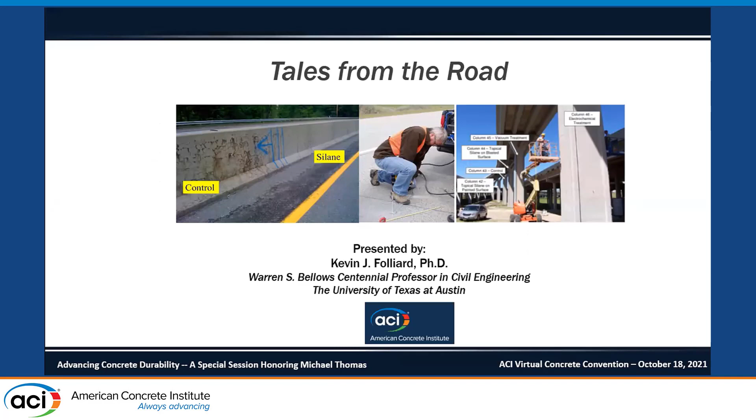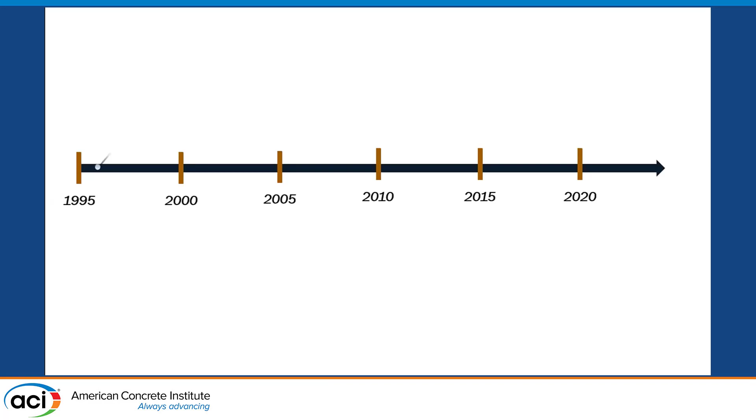Just thought I'd start with a real quick timeline of my experience with Mike. My very first interaction with him was when I was a research engineer at W.R. Grace, having just finished my PhD. It was Doug and Mike that came to visit us in Cambridge. I remember they both gave great technical presentations, and when I walked out of the room, I had one thing in mind: the picture of a moose that Mike put in the middle of his presentation for no reason, just saying, 'This is a moose.' I kind of liked that. It stuck with me for a while, not only the technical goodies I got, but the humor.

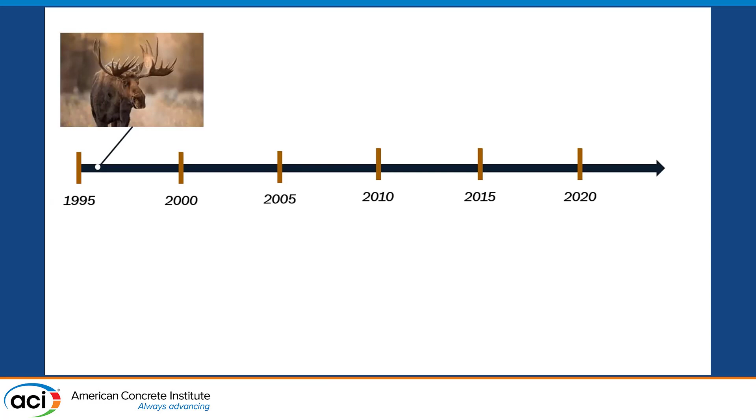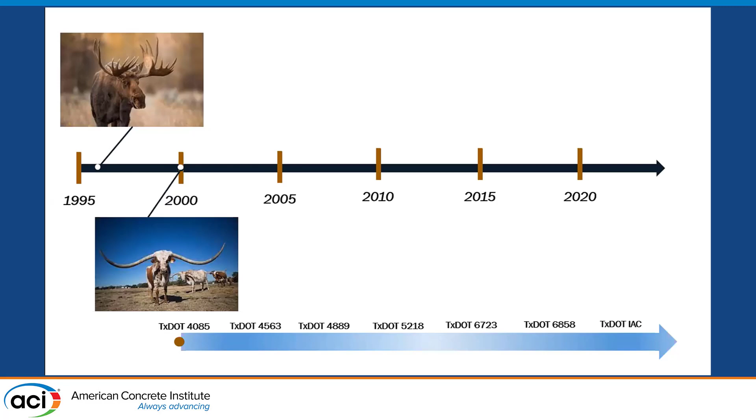I didn't have really any interactions with him for several years until I moved to Texas. In the year 2000, I reached out to Mike because we had a TxDOT project we were bidding on related to ASR. Since then, we've been working continuously, a 20-year-plus collaboration that's still ongoing, on a whole bunch of different TxDOT projects, mostly related to concrete durability. In fact, Mike was honored with a great bumper sticker because he's done so much great work in Texas. So he's a true Texan now.

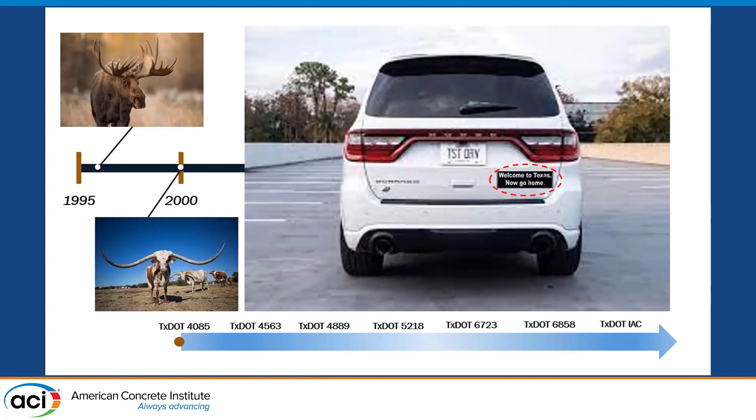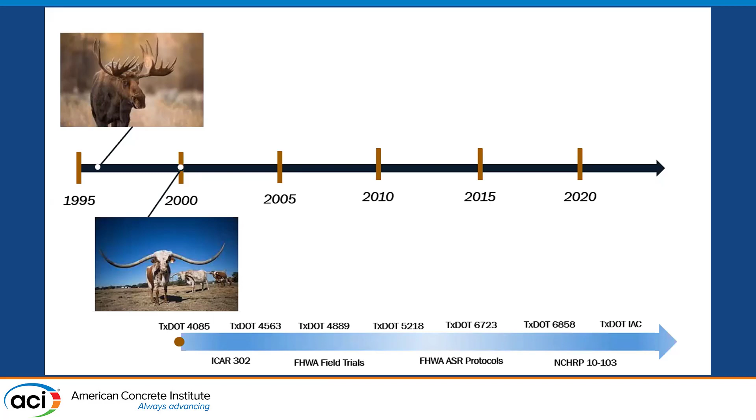Our work extended beyond TxDOT projects to funding from ICAR, Federal Highway, and more recently the NCHRP project with Jason and Thano and myself and Ben. In addition to that, I've also had the pleasure of teaching training courses with Mike for most of the last 15 years, both for industry and academia.

There are occasions that we actually put on small skits, and this was one where we were pretending to be admixture salesmen. So I guess the question is, would anybody buy admixtures from us? I would tend to doubt it, but we'll see.

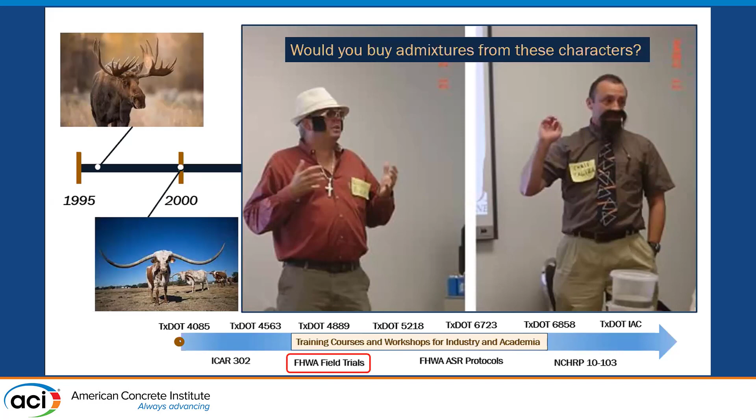Mike's had a tremendous impact on me personally and professionally. When I first arrived at University of Texas, you can see this picture, we had a lot of space and a very ugly, unusable lab. One of the things I learned from Mike is that exposure sites are absolutely critical when you're doing durability work.

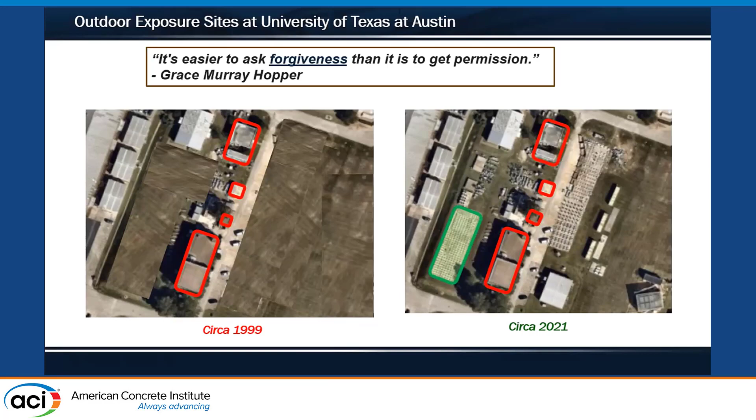Fast forward 20 years later, we have the original footprint of our buildings, but now you see a recent map showing a very large ASR, DEF, and sulfate exposure site. We have sites for bridge deck cracking, ASR for existing structures, carbonation, and more ASR. So I've learned from Mike: you don't ask, you just take. So far, nobody has tried to take any of our land back.

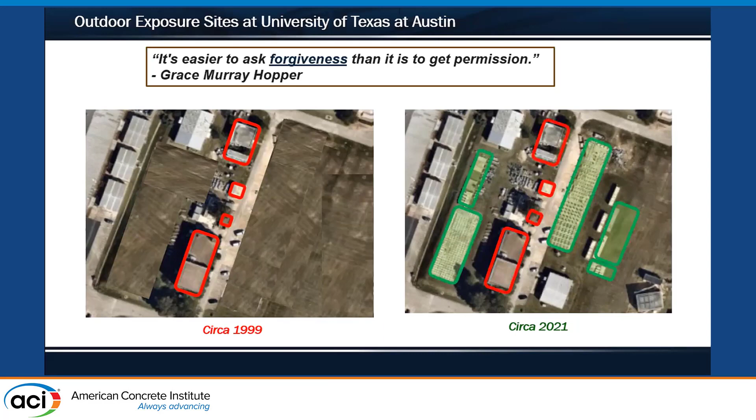We've extended our exposure sites beyond Austin. We now have sites along the coast in Port Aransas, and also a West Texas site. Mike and I have been frequent visitors to the marine site, but neither of us have made it to the West Texas site, and you might be able to guess why. These exposure sites have had a great impact on our program, and honestly, we wouldn't be doing any of these sites without Mike. Most recently, this marine site, which is really unique, having some space on the Gulf of Mexico.

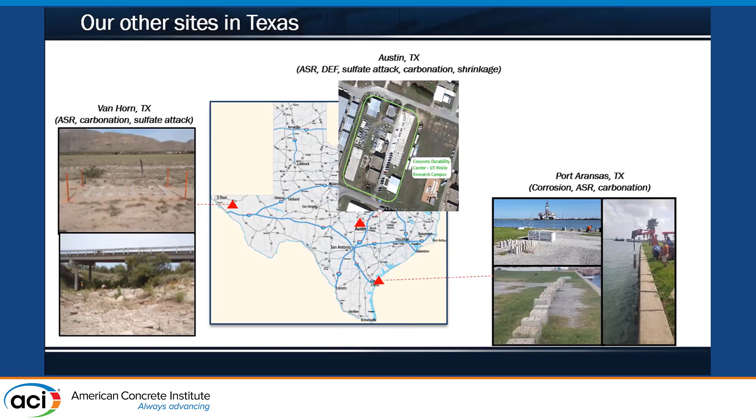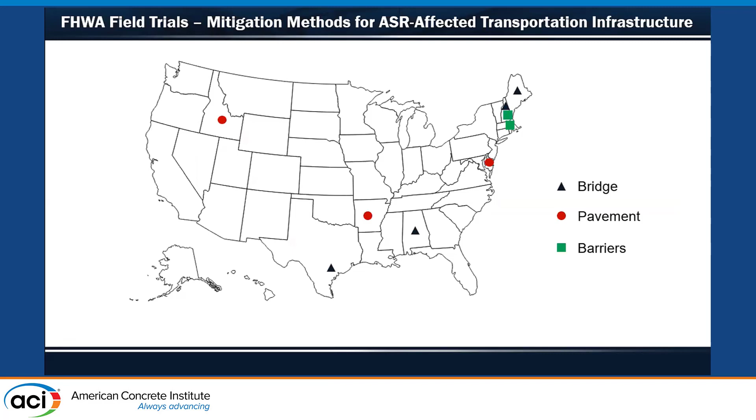What I am going to be talking about today is mainly just focusing, pretty quickly, on the work we did under a multi-year Federal Highway project. The goal of this project was to look at technologies for trying to slow down ASR in field structures. This included bridges in various states, pavements, highway and bridge barriers, and we also included two outdoor exposure sites as part of our field trials. Personally, one of my proudest accomplishments is convincing the Federal Highway Administration to allow us to build an exposure site in Hawaii, and I think collectively, as a research group, we're very happy with that decision.

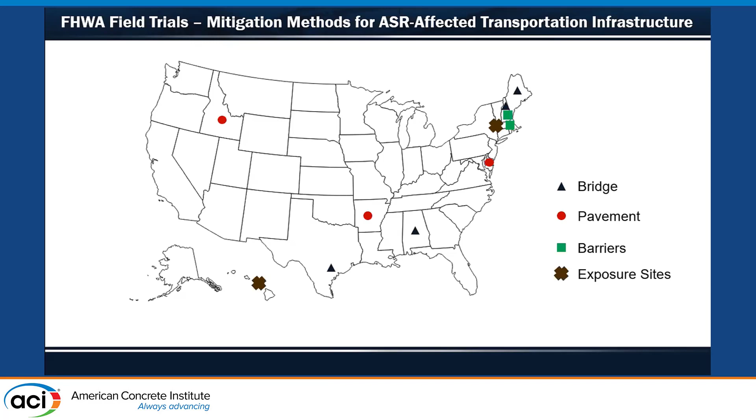What I'm going to focus on today are just a couple of these trials, really quickly, and then we'll move forward.

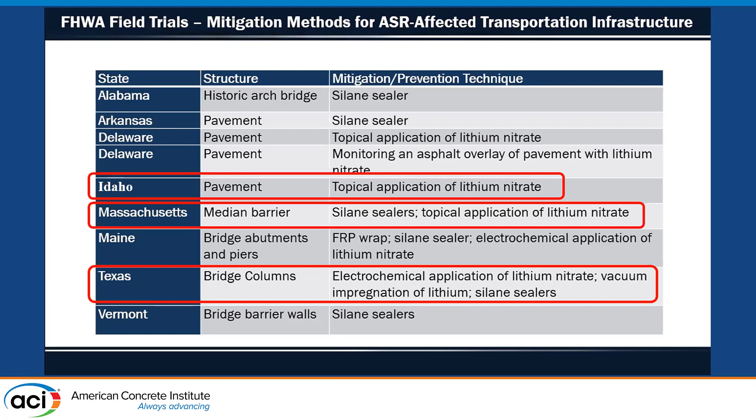These federal highway trials covered a whole range of different structure types and geographical locations. I'm going to focus on just a couple of these, in Idaho, Massachusetts, and a little bit of work in Texas as well. This funding was actually allocated through federal highway funding, earmarked for lithium research.

Lithium has been shown to be effective in reducing expansion in new concrete, provided you put enough in and the aggregate responds to it. The mechanism by which lithium prevents ASR is still not completely understood, but we believe it has to do with modification of the gel, where lithium is incorporated into the alkali silica gel and creates a much less expansive gel.

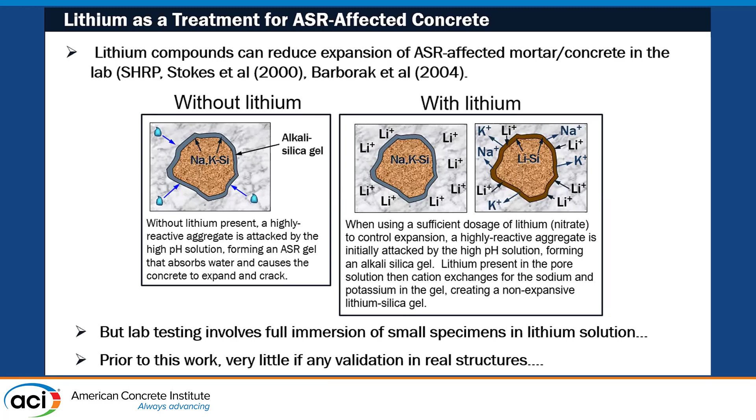The fact that it works on the existing gel has created interest over the years in using this as a post-treatment for existing structures. There has been work showing that in small laboratory samples, you can reduce ASR expansion. But we have to keep in mind that the vast majority of this work has been done on very small samples with full immersion, which is certainly not realistic with regard to field structures.

When we first started doing this work with Federal Highway, there had been quite a few field trials prior to this in the US involving lithium as a post-treatment for concrete. Almost all of this work involved pavements, with some work done on bridge decks. The problem is, historically, there has been essentially little or no data to confirm whether lithium is effective in this post-treatment regime. That's kind of the way we came into this project, with that as a backdrop.

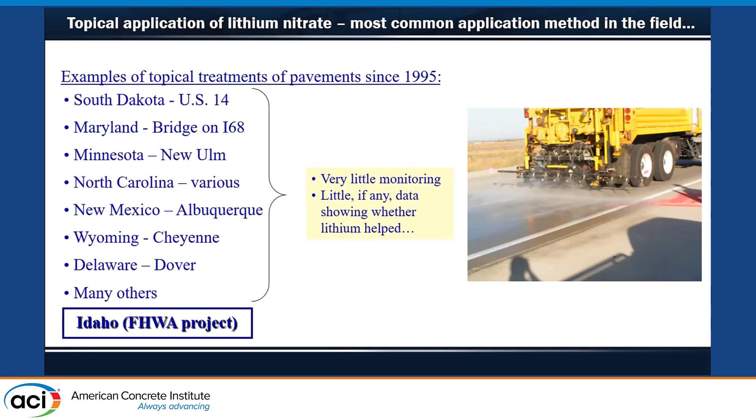One of the things we started with was looking at a freeway on I-84 in Idaho, in mountain home, Idaho, that has suffered significant ASR-induced expansion and cracking. It was an ideal site because it was relatively long and had pretty large sections with different levels of damage to date. We were able to pick essentially 3 different degrees of severity, and for each of those, we did topical lithium treatment.

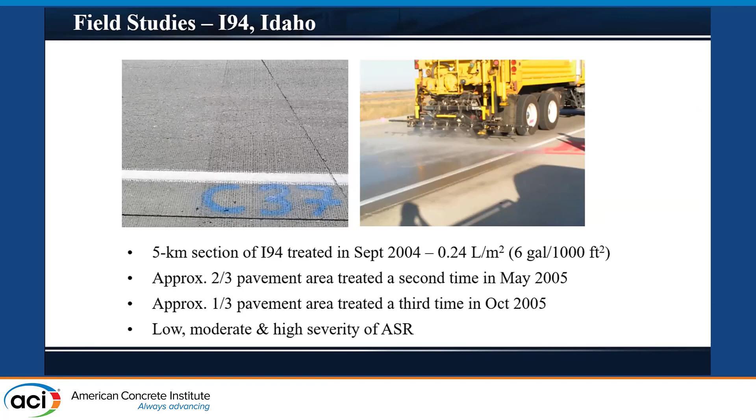In some cases we did multiple treatments, and then we did full-scale monitoring. When it comes to monitoring in the field, we do a lot of in situ measurements where we embed gauge studs into the concrete for expansion measurements. We also track cracking and crack widths with a crack mapping technique, and later on we come back and pull cores to see how much lithium penetrated into the concrete.

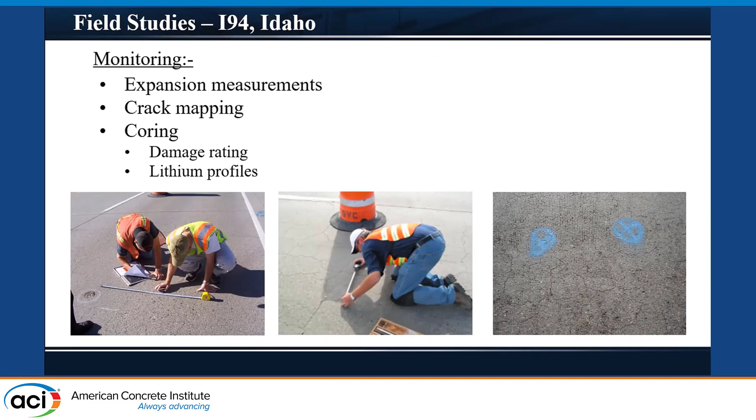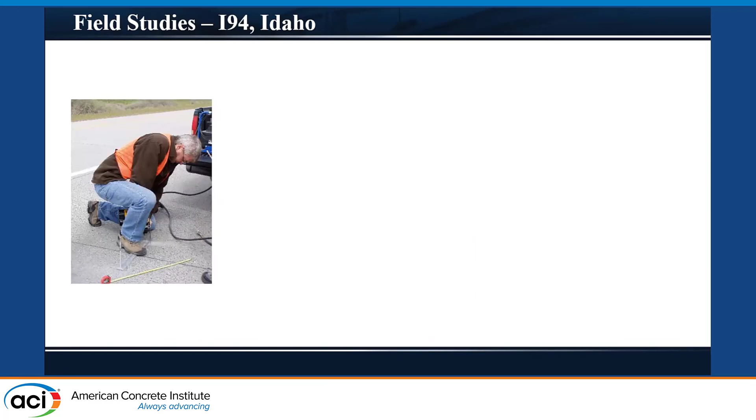When we first arrived in mountain home and started to drill into the pavement, we had a heck of a time with this pavement. Here you can see Mike trying very diligently to drill into that concrete, and it just wouldn't go. We were eating through drill bits one after the other, which led to discussions about the geological formations in Idaho. We had all kinds of detailed studies, but didn't have a lot of time given that we had lane closures and had to get our job done.

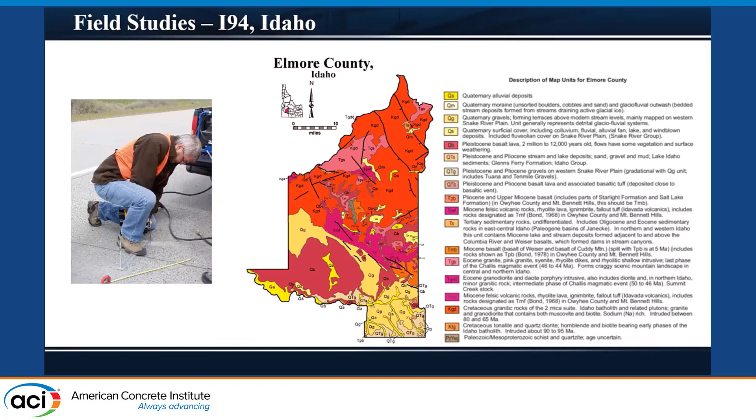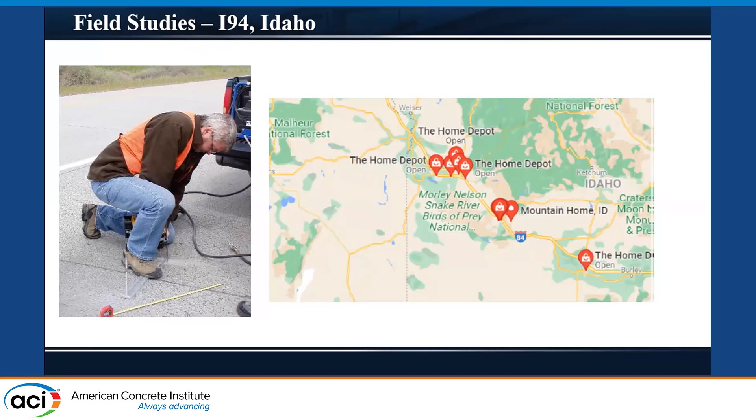So as a good team, we sent our crew to various Home Depots throughout the state to pick up every masonry bit we could find and bring it back to us. One of my grad students came back with the drill bit and asked if he could give it a shot, at which point he realized we were drilling in reverse. So that's one of the names we call our team, the reverse drillers, and that's why. Ultimately, when we reversed the direction of the drill, everything worked fine.

And not very helpful when you consider that the upper 1 or 2 millimeters are already carbonated, so they already have a low pH, and it's succeeded in reaching the one part of the concrete that doesn't need it.

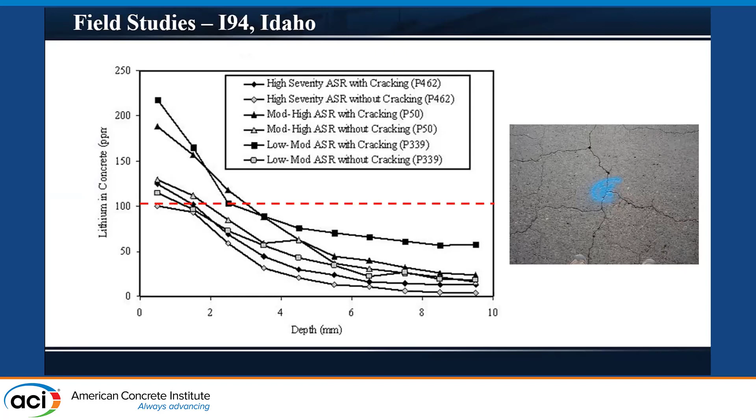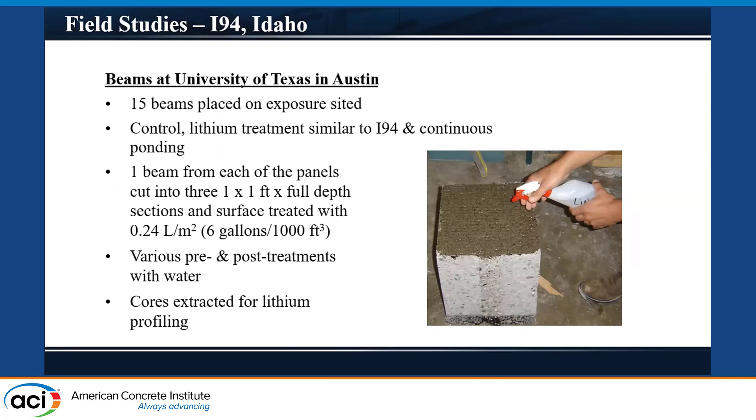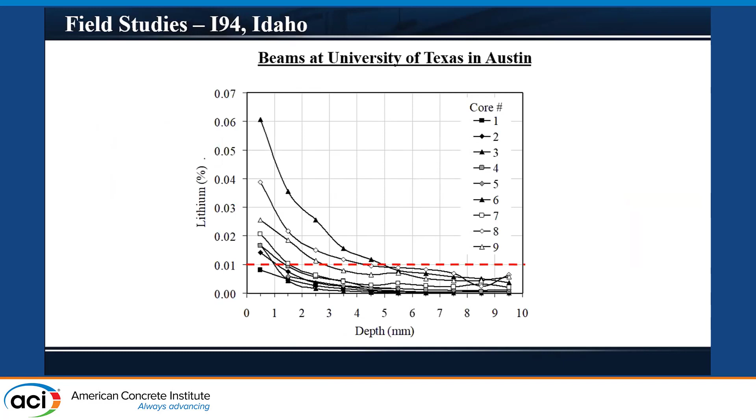We then took some large full-depth pavement sections from Idaho back to our lab, split them into different cubes to create miniature exposure blocks, and we sprayed lithium in different combinations. Once again, we saw that the depth of penetration was, at best, 1/4 of an inch or 1/8 of an inch. It's consistent with what we saw in the field and consistent with what you would guess logically.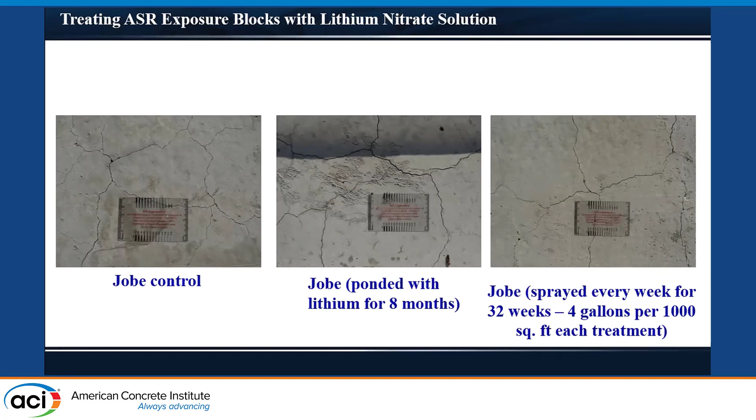We took it a step further and decided, well, why don't we just cast full outdoor exposure blocks with known materials and known reactivity, and look at the best possible case scenario ever, which would be to continuously pond your block with lithium nitrate solution, which we did in the middle sample. The left is a control. And on the right-hand side, we did something slightly more practical: we sprayed it every week for 32 weeks.

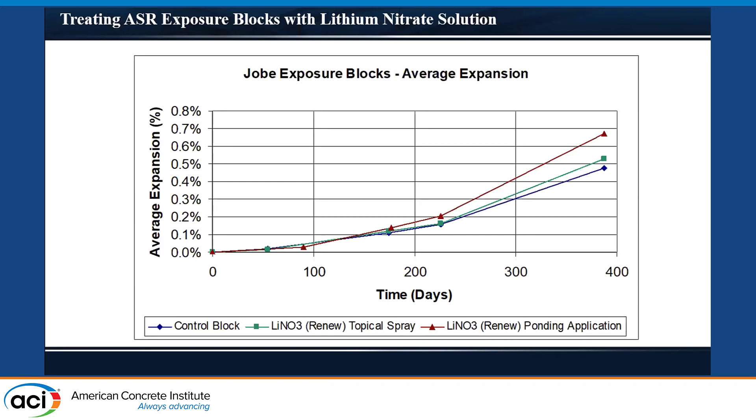And at the end of this time period, lo and behold, nothing worked. In fact, both of those sprayed samples expanded more than the control, which perhaps suggests that the fact that a 30% lithium nitrate solution has 70% water may, in fact, be driving ASR more than the 30% lithium is controlling it.

So basically, what we showed with this is that topical applications or even ponding really isn't very practical. We continued on to one of our other sites, which is here in Houston, and this is a large-scale bridge that suffered from ASR. In this case, we looked at both silanes as a way to try to reduce the internal humidity, and of course we looked at lithium, which was the source of this funding.

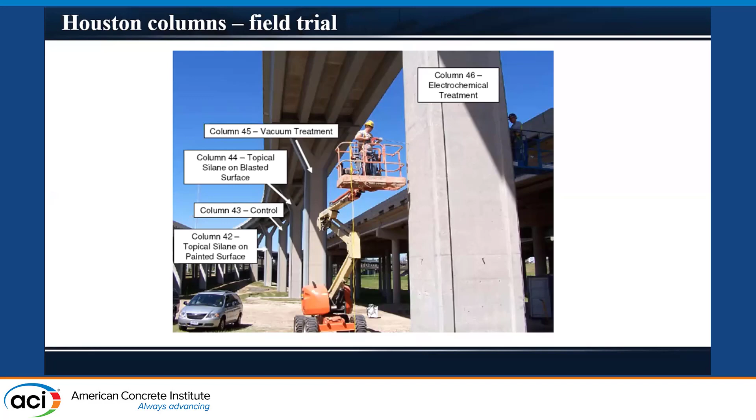But in this case, we didn't want to do any topical treatment—we knew we hadn't had success to date with it. But we did try two more rigorous methods of trying to get lithium into the concrete. On the left-hand side, you can see we hired a contractor who did a vacuum impregnation of the column. And on the right-hand side, we used an electrochemical migration technique where we couple to the reinforcing steel, and then apply lithium solution for several weeks to try to drive that lithium deeper by tying to that rebar, which is about 2 inches from the cover.

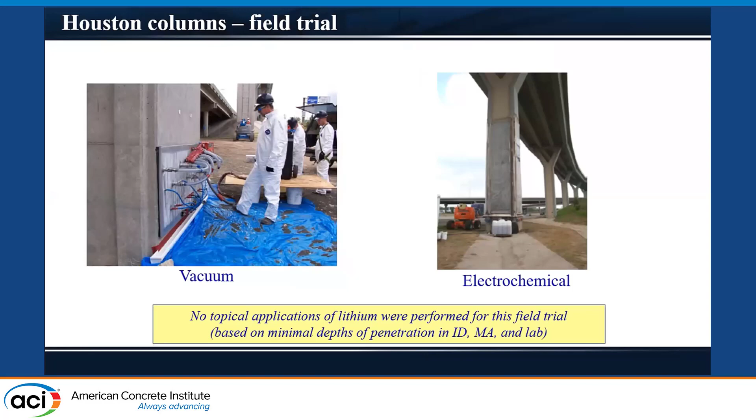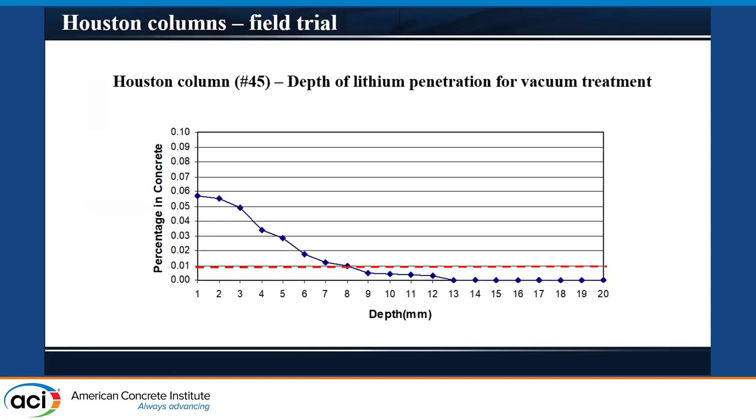Well, in the case of the vacuum impregnation, we got about 1/3 of an inch. Again, that isn't going to help you very much with a column that has, say, a 5 foot least dimension. And when it came to the electrochemical method, we were actually quite pleased to see that we were able to get much higher levels of lithium all the way down to the reinforcing steel.

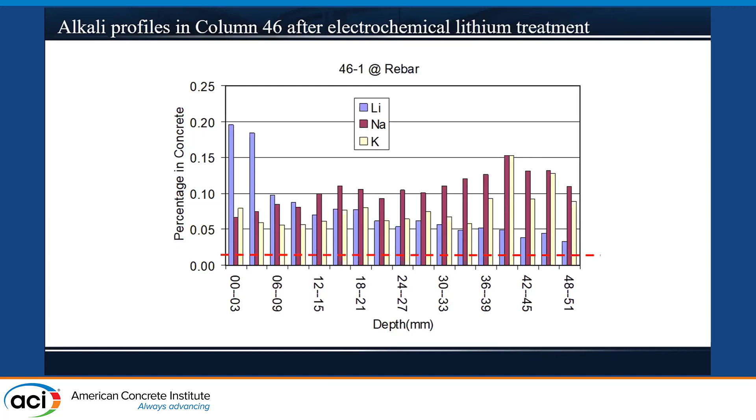Our data through now 10, 15 years of monitoring shows that none of these lithium techniques were beneficial at all in suppressing ASR expansion.

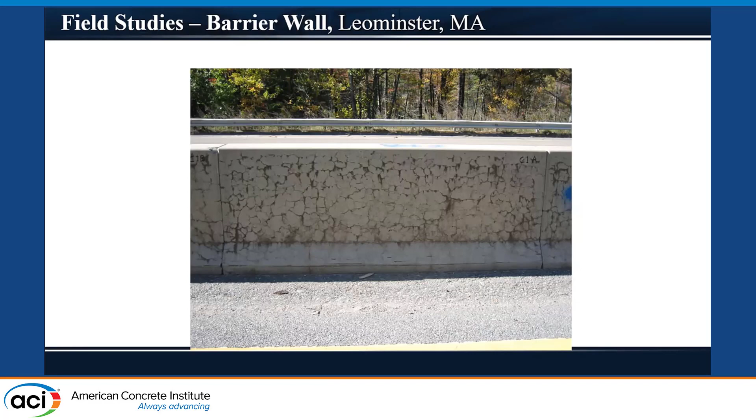My last one, I'll get to it—I'm going as quick as I can here in the interest of time. We did some work in Boston with highway barriers outside of Boston, in Leominster. We selected different sets of highway barriers with different degrees of severity, and again we looked at different treatment options, both silane and lithium.

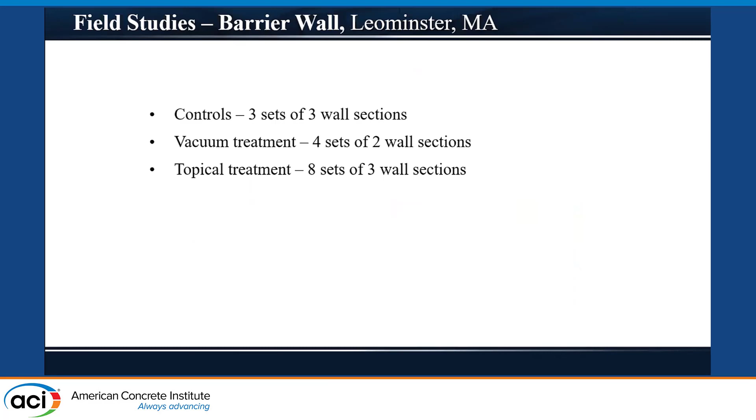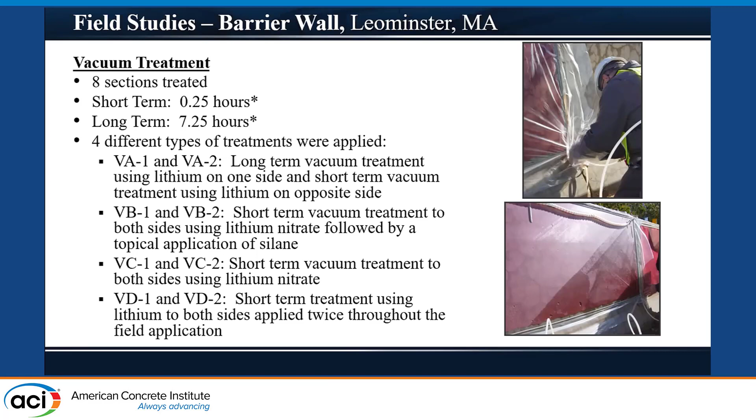We used a vacuum impregnation technique to again try to drive the lithium into the concrete deeper, and we looked at a variety of different combinations of silanes and different types of sealers. In a nutshell, first of all, with regard to our desire to drive lithium in, we were, again, not very successful.

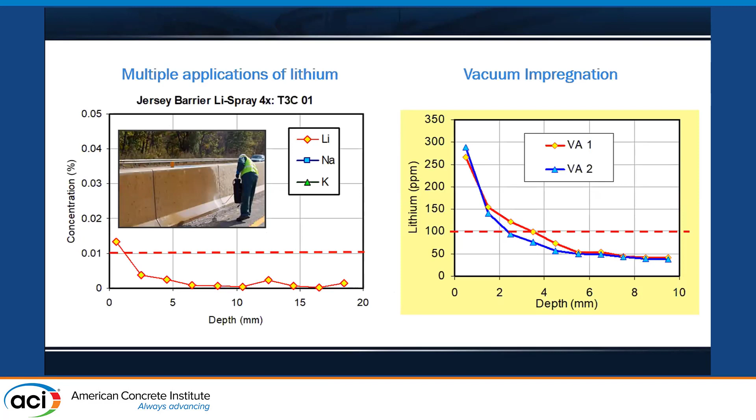Topical applications barely got in, and the vacuum impregnation again was less than a couple of millimeters. So it's just extremely difficult to drive lithium into concrete, even with these advanced techniques.

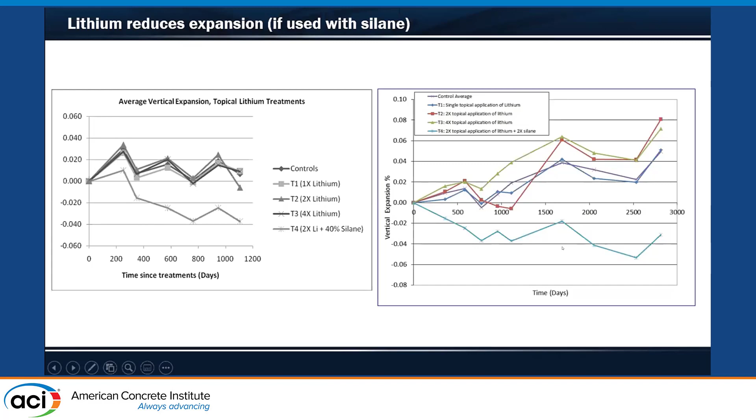However, we did find that lithium does work as long as you combine it with silane. Silane is a spray-on material that forms a hydrophobic coating, and with time it lowers the relative humidity inside. It is breathable, so it allows vapor to get out. You could see with these Boston barriers that the ones on the bottom in both cases contain silane.

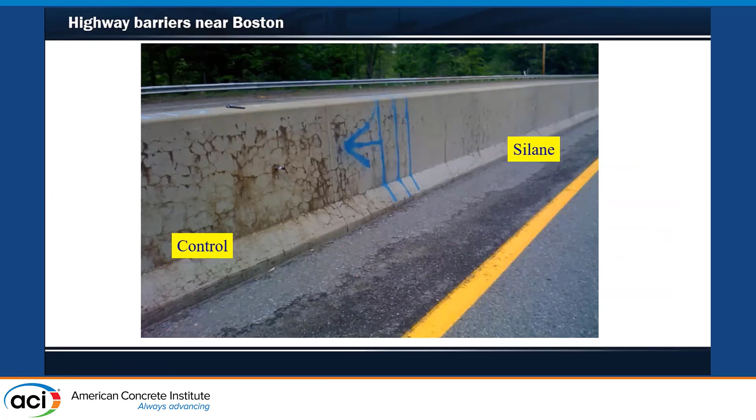With time, the relative humidity dropped and expansion came to a halt. You could see photos here - the left-hand side is control, the right-hand side is silane. Here's another picture, and we have confirmational data to show that the relative humidities were well below 80% with the treated sections.

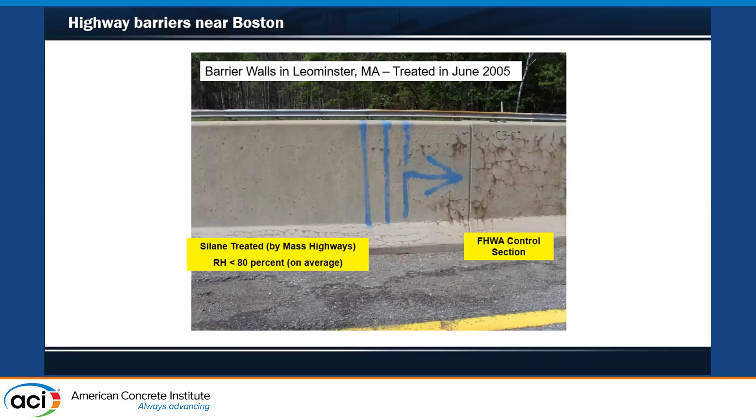So it's an ideal situation for silane, where you could treat from both sides and dry it from the outside in. This is really the single success we had in all of this federal highway funding, so I thought I would end with a good story. This is consistent with experience in Canada that has shown that treating barriers with silane has long-term effectiveness, both

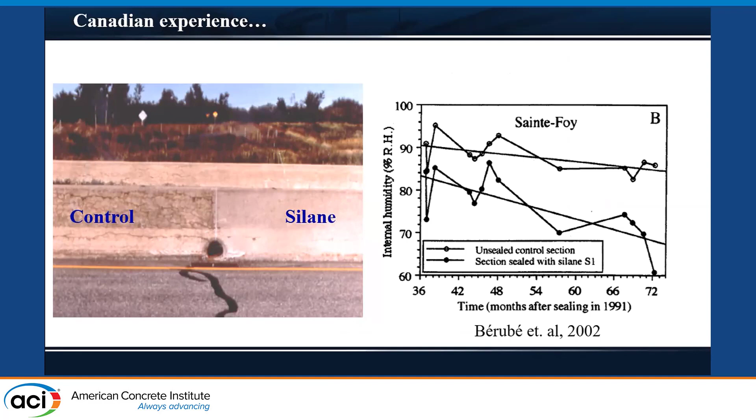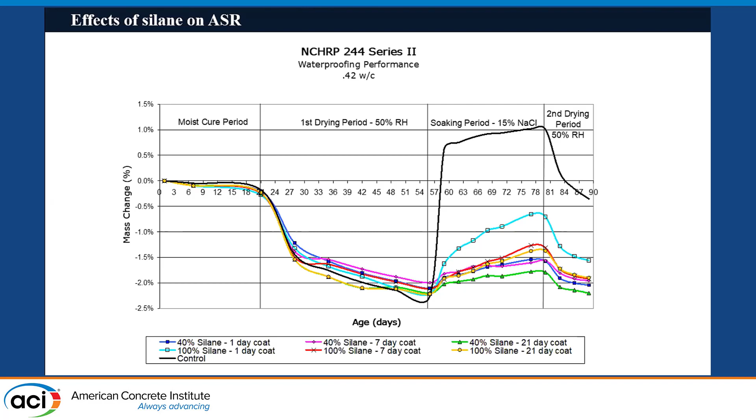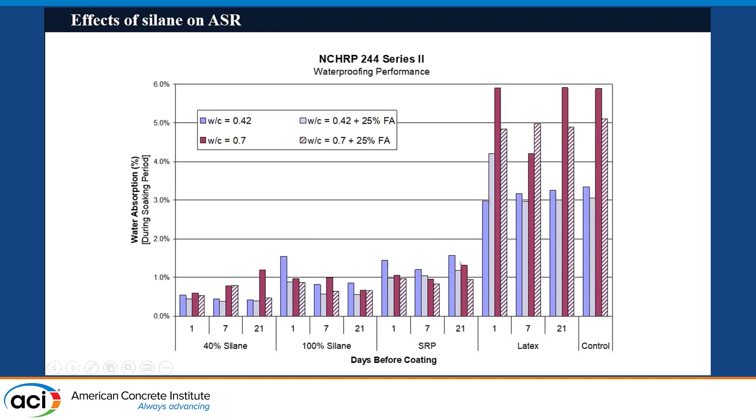You could see that the relative amount of water absorption is a fraction of the straight control mixes. So silanes do work really, really well, provided you apply them correctly. We have long-term outdoor exposure data to show this as well - when we see a product such as silane working well, we do see internal relative humidity reductions, and we do see reductions in expansion.

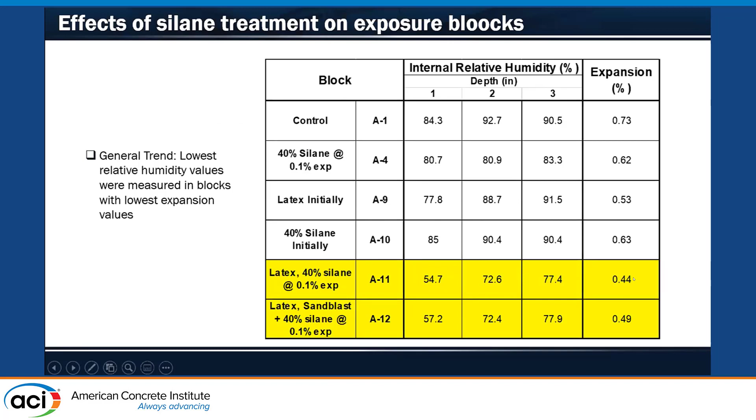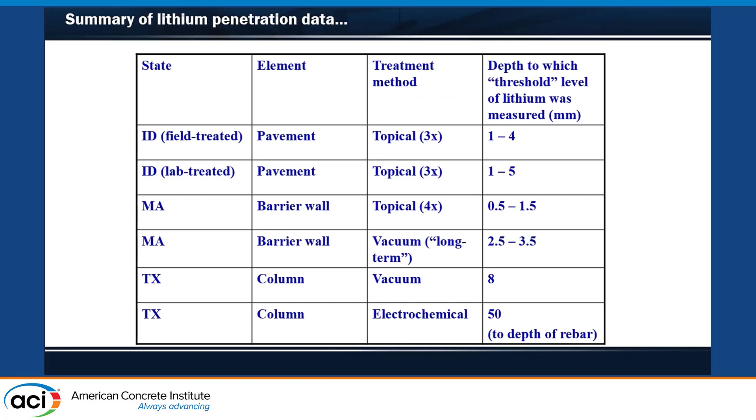So there is some light at the end of the tunnel, but just finishing off with the lithium story, we really don't see any reason to focus on this anymore. We've found very little success in everything we've done with lithium treatments, but we have been more lucky on the silane side, or more fortunate, I should say.

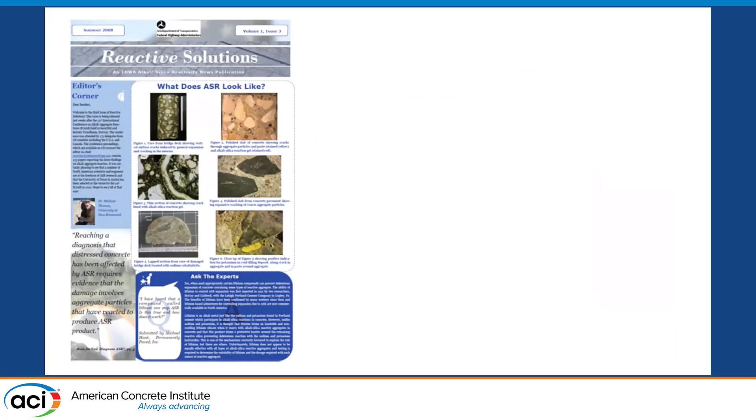There's been a host of publications that have come out of this federal highway work, just shown here. One of the publications that Mike took the lead on was Reactive Solutions, a newsletter that would come out once a month. Mike had the Editor's Corner and Ask the Experts, and he had to respond to all kinds of tough questions from folks all over the country, including Michael Hunt here, who had a heck of a question about lithium. Mike did a really good job with this publication, answering all kinds of questions throughout.

Lastly, my last slide here - some facts about Mike. He was formerly the lead singer of the Flying Buttresses. They were a well-known band in very small quarters of the UK. They had a couple of sitting-room-only shows. Mike was a really good singer, but then he quit and moved into concrete.

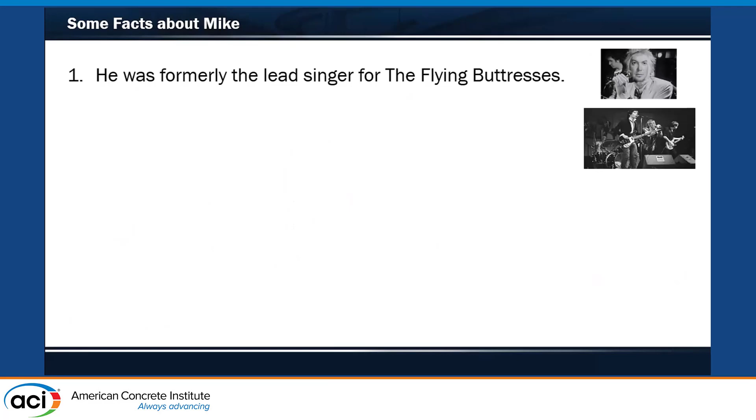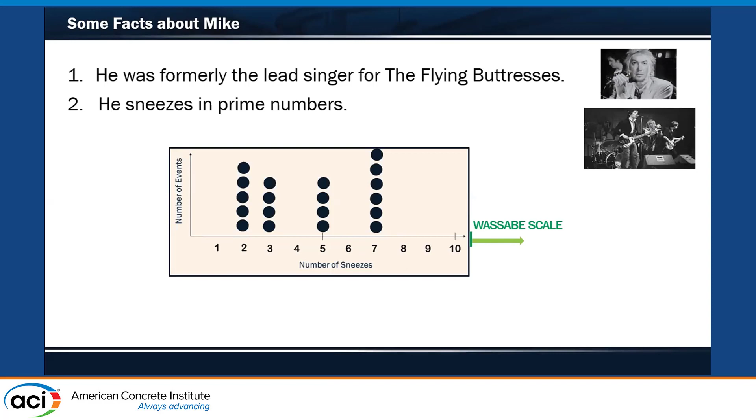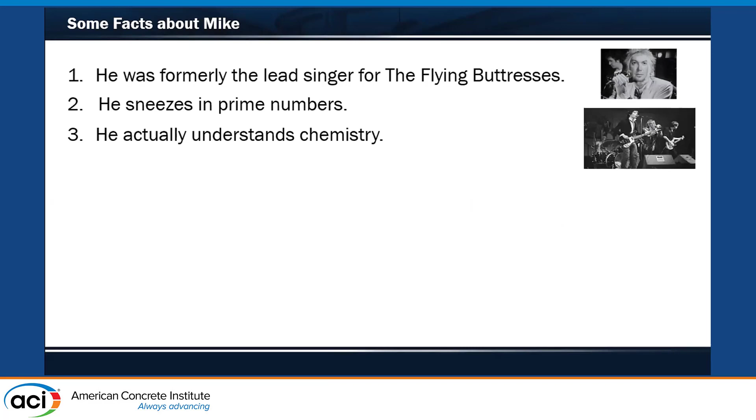Also, Mike sneezes in prime numbers. We've collected data over the years, done some Monte Carlo simulations, and lo and behold, he always sneezes in prime numbers. We need some more data on what we call the wasabi scale, because when Mike eats wasabi, he sneezes 11 or 13 times, but we don't have enough data for a precision and bias statement. Mike understands chemistry better than any civil engineer I've ever met - he's the only one who can recite the periodic table at will.

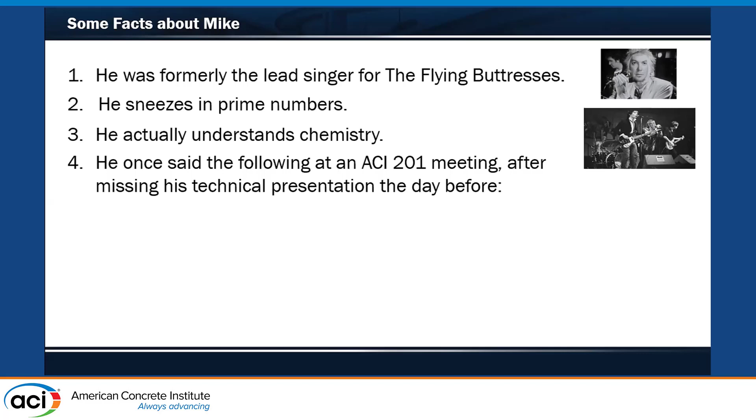Lastly, I'll finish off with one of Mike's most famous quotes. This was in 2004, ACI in San Francisco, where Mike had uncharacteristically missed his technical presentation at a session the day before. Well, at our ACI 201 meeting, Mike's famous line was, 'I've slept through many presentations in my time, but this was the first time I slept through my own.'